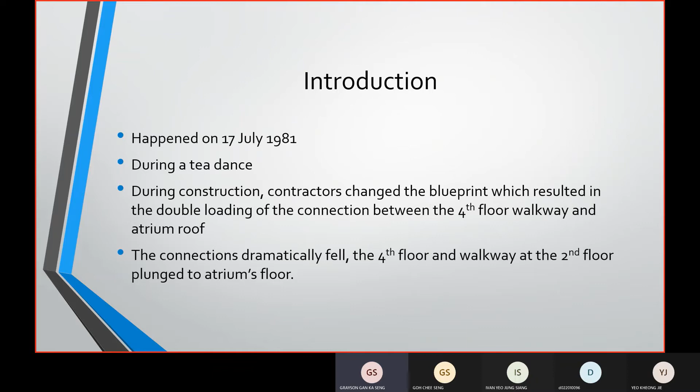The Hyatt Regency Hotel is now referred to as the Sheraton at Crown Center. That's all for my introduction, thank you. And this is some of the images during the tragedy.

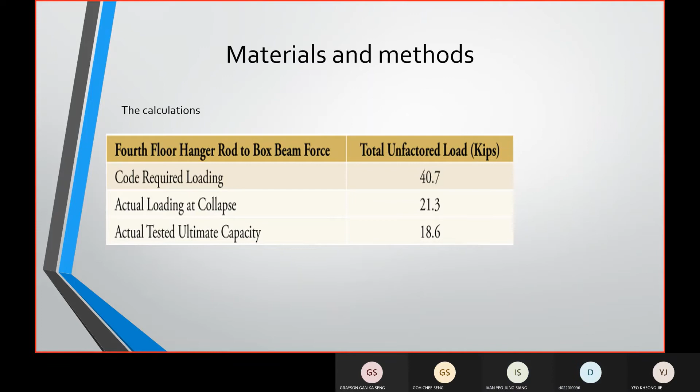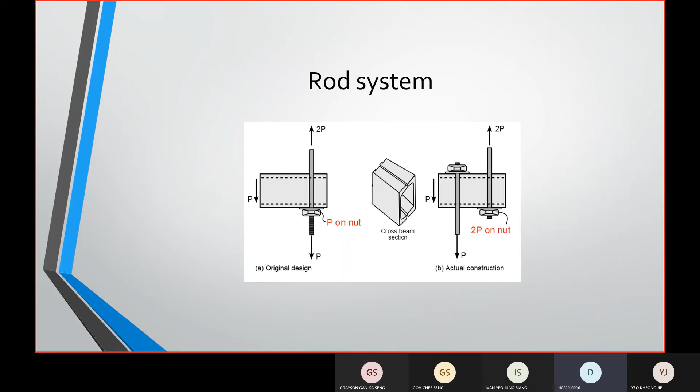Okay, next, this is the impact of the incident. The condition of people involved caused 114 deaths and 186 injuries. The hotel was closed for 3 months and $140 million were paid to the victims and their families.

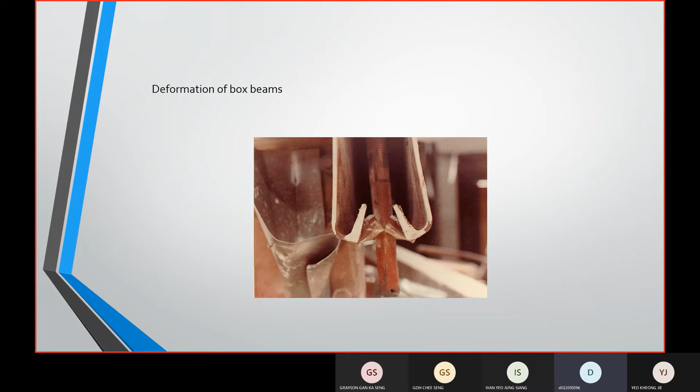Next, these are the methods we use in this review report. One of the methods used is the online research method. Information and documents regarding our topic are retrieved online from a variety of websites.

Secondly, the method used is document analysis method. Textual contents found in any form of sources are studied. Data analysis is also used in this report, as the data obtained from internet is analyzed carefully to bring out trustworthy data. To top it all, the observation method is also used when doing this report.

Good evening, sir. I'm Kheong Jie, and I'm here to present the results and discussion we carried out in our report.

After the Hyatt Regency walkway collapse occurred on 17 July 1981, a process of investigation was carried out to determine the information of this case. Based on the result, we can conclude a few facts which are about the design of hanger rod connection, fabricator, improper inspection during construction, and the walkway being incapable of holding the expected load. These factors should not occur if the construction of walkways follows standard operating procedure.

Additionally, the minor collapse of the atrium roof occurred when the hotel was under construction. This minor accident did not receive any attention from the construction team, and the inspection team did not make any effort to check it.

Therefore, we can infer that the construction and inspection team of Hyatt Regency Walkway did not conduct their work professionally in practice of engineering. This is very terrible because it causes engineering safety and health issues which may cause casualties during and post-construction.

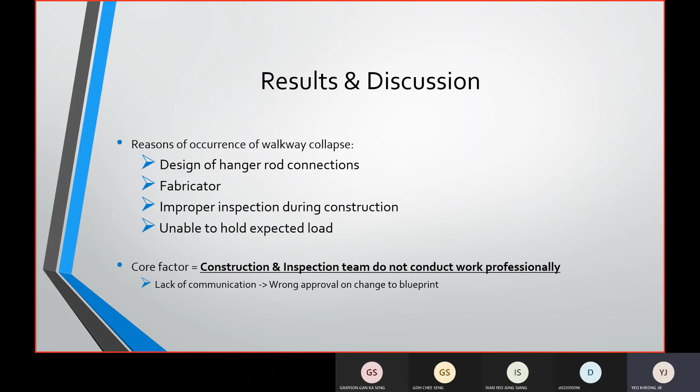Based on investigation, the final product of the hanger rod used in Hyatt Regency Walkway is different from the original drawings on the contract. Now the slide is showing the blueprint of the walkway. In the original blueprint, each hanger rod acted as a continuous connector between the second floor walkway and the hanger rod bracket attached to the frame of the atrium roof.

According to the blueprint, the investigation team found out this design contributed to the collapse of Hyatt Regency Walkway. Jack D. Gillum, head engineer, and his structural engineer team decided to use a fragile box girder structure to make the entire walkway look fascinating. The concrete walkways along the long side of the bridge are supported vertically by two groups of I-steel, labeled as W16 X26 on the blueprint.

On the other hand, the horizontal axis of the concrete walkway along the short side of the bridge is supported by the box girder, whose function is to fix the steel tie rods. Two C-beams, labeled as MC8 times 8.5 in the blueprint, are used to weld the box girder.

A long steel tie rod fixed to the roof is used to connect the walkways on the second and fourth floors. Referring to Jack D. Gillum and Associates' original design, the bridge joint can withstand 180 kilonewtons of load. However, the standard capacity of the joint must be capable of carrying a load of 302 kilonewtons without any structural problems, according to the local building code of Kansas City.

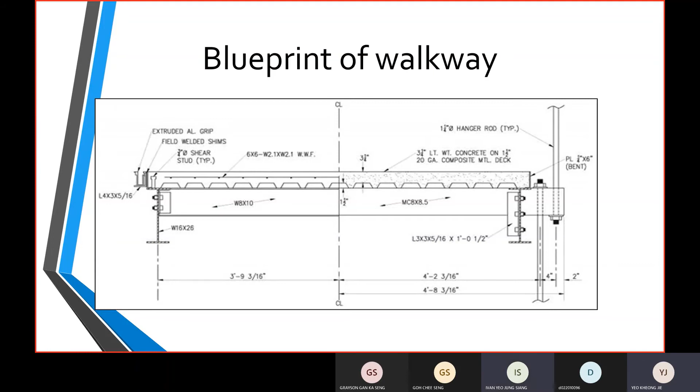The load capacity of the walkway only fulfills 60% of the requirement, just for the appearance effect. Furthermore, the structural team and construction team had a lack of communication.

Due to inconvenience in manufacturing, transportation problems, and difficulty installing the initial design, a change of design was suggested to solve these problems. However, the change to the design was not verified properly because the design team thought it had been tested and approved by the construction team, so they proceeded to stamp the approval seal.

On the other hand, the structural team and the construction team also thought the change to design was checked and approved by the design team. This subtle change to the design seemed acceptable, but it became the core factor of the accident.

Based on the post-event investigation report by Bernhard T. in 2016, it stated a total death toll of 114 people and more than 180 people injured. This tragedy heavily affected the whole of Kansas City and the United States, and caused the engineering community to improve their quality as a moral lesson from this tragedy.